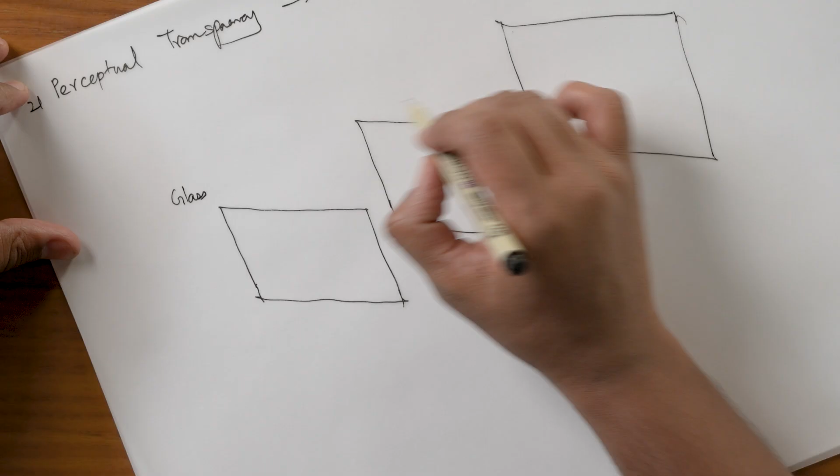We brought in the essence of slow living into this 21st century home. We try to achieve it by using the principle of spatial layering. Let's say this wall is glass, and then this is a kind of a porous jali, and let's say this

is another translucent partition. Let's assume that there is a kind of greenery between these two planes, and there is a kind of water body between these two planes. Imagine when a person perceives this particular series of planes with different kinds of materials

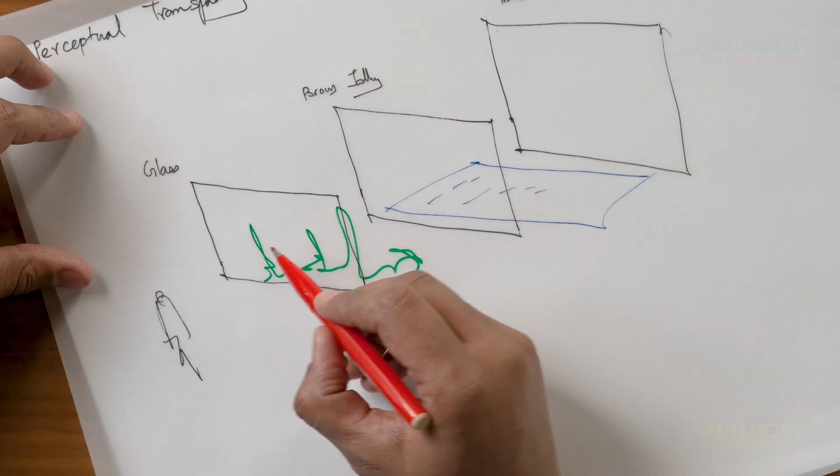and with different kinds of mediums between it, it will create different kinds of experiences. It will emote different kinds of experiences. So everything, if you change the order, it might emote a different kind of feeling.

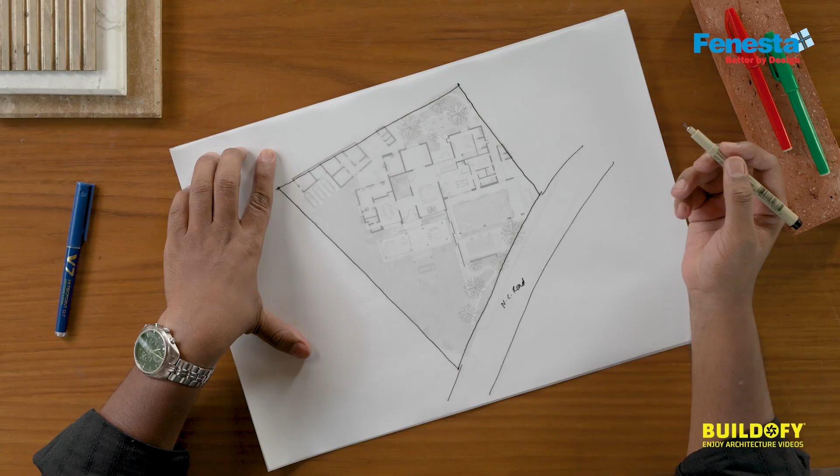So the site is almost spanning around 23,500 square feet, which equals around 10 grounds of property. It is abutting a sub-road which is called the North Crescent Road. If you look at the orientation of the site, this is basically the north point of the site.

So basically the site is a north-facing property. When we first visited the site, there was already an existing building structure. We were looking at repurposing the building, and we had to retain the RCC framework, which is the roofs, columns and beams, and brought down all the wall structures so that we can try to zone different spaces based on the client's requirement.

This is the entrance gate for the property, located in the northeast quadrant of the building, which is one of the very preferred locations as per Vastu. The car comes over here. You can see the movement of the car will be something like this.

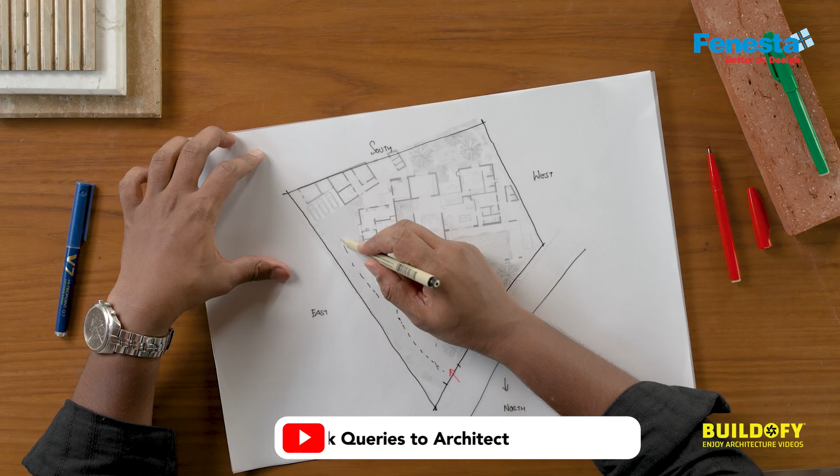It comes here and then drops people here. Then it turns back and can park here or go out. This was the circulation pattern, or it can go towards this direction, and there were 3 car parks in the rear part of the building.

So there is an entrance portico where there is a furniture arrangement in the formation of an L, so that people can just wait for the clients, or if any guests come, they can come for a coffee here. They can enjoy the early morning coffees or read newspapers, and they're surrounded by nature on all sides.

And the home office is situated right outside. So this is where we wanted to bring the aspect of work away from outside the main living habitable spaces. This is the entrance foyer.

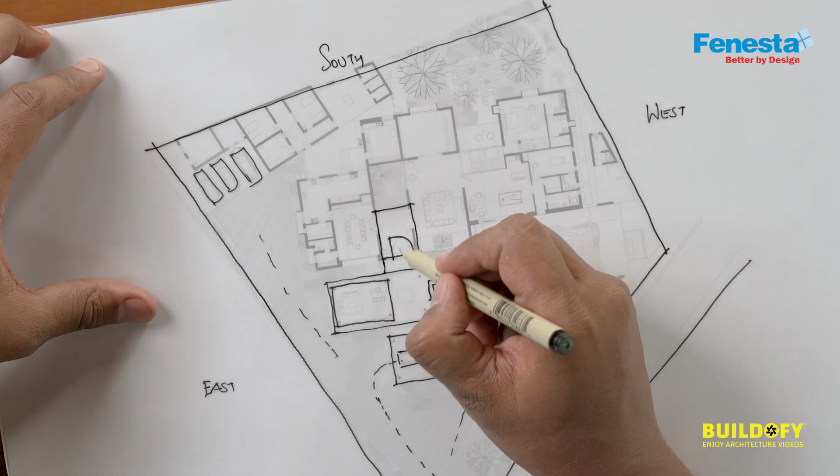This is almost a kind of transitional space, with a nice 8 feet door which opens out into a Zen court. The Zen court is a kind of welcoming court for a person, so it puts them in a sense of calmness the moment they enter.

And from there, if you take a left, the dining is secluded very strongly towards the east side of the property, where the dining is situated here, a 10-seater dining.

You can see that this is the shape of this complete living area, which is quite grander with a nice double height. And this overlooks into a green pocket over here. So basically this living will get a very nice early morning north light, and a nice very diffused lighting throughout the day.

The recreation lounge is a kind of place where the clients can just sit back, relax, or do a book reading there. And this particular space opens out into a very nice pool over here, which is surrounded with very lush landscapes.

About the idea of perceptual layering, where we try to layer this particular recreation lounge as an indoor space, sandwiched with the green space on this side, and also a green space on the rear side, so when you sit in that room, you will be seeing greeneries on both sides.

This particular zone has got a very nicely lit path where the swimming pool area's flooring is covered with wooden decking material, and the main pool's flooring is with broken kadappa. We try to camouflage the natural material so that it creates a very good essence in the space.

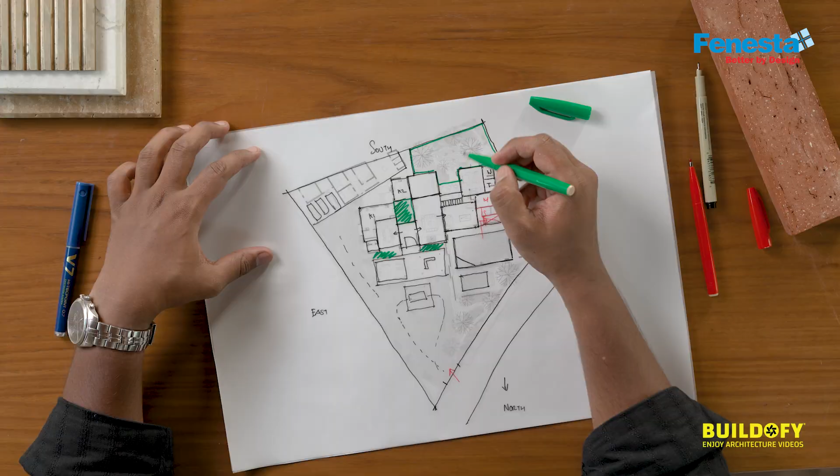This tropical garden forms a kind of a mini micro forest, I would say, so it really helps in changing the climate of the place. This is completely dense with landscape, and we believe this space will be used as a space where one opens out themselves, it's self-reflective, and they connect with nature. This garden can also be viewed from different levels—the master bedroom's balcony overlooks this garden, so it forms a kind of back-end retreat for them.

The laterite is one of the very key elements. This is a finish we used to create a jali wall using laterite blocks. This strong red terracotta forms the central language of the house, a kind of pivotal plane in this entire project.

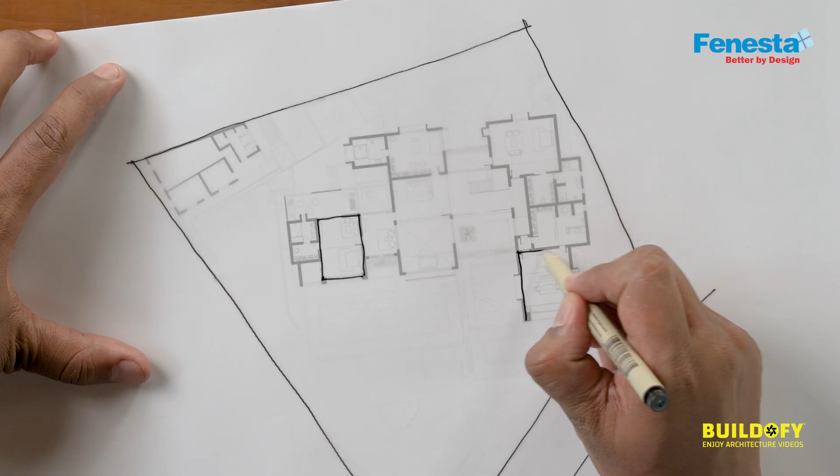This is the floor plate of the first floor. On the west side we have two bigger bedrooms, one of which is the master, and we have got the third bedroom over here, and the fourth bedroom with its walk-in and toilets over here. So the organization of the bedrooms is such that the east side has two bedrooms and the west side has two bedrooms.

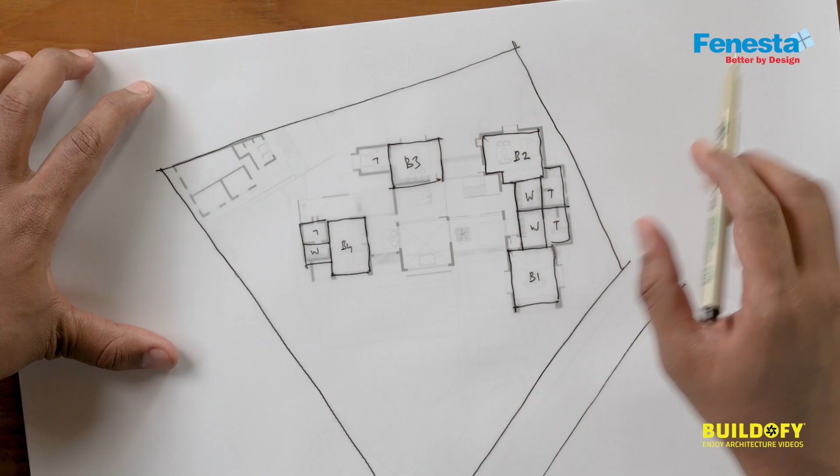The moment you come from the ground floor to the first floor, this is the central core, which has got a dog-leg staircase. So the moment we come here, we are landing into a very nice transitional space. This transitional space connects two bedrooms, and also from the transitional space you can get into a court with a smaller gazebo at the top of this, and from this court you can overlook the pool.

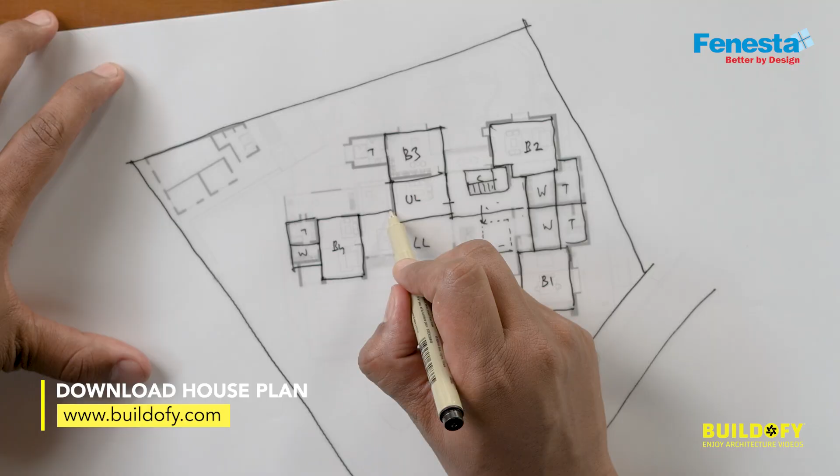So this is a moment where you will have a very good visual connection with the ground floor. The upper living overlooks into the lower living, which is a double height space, and from this upper living it again connects to a kind of ante space, which connects to the other bedroom.

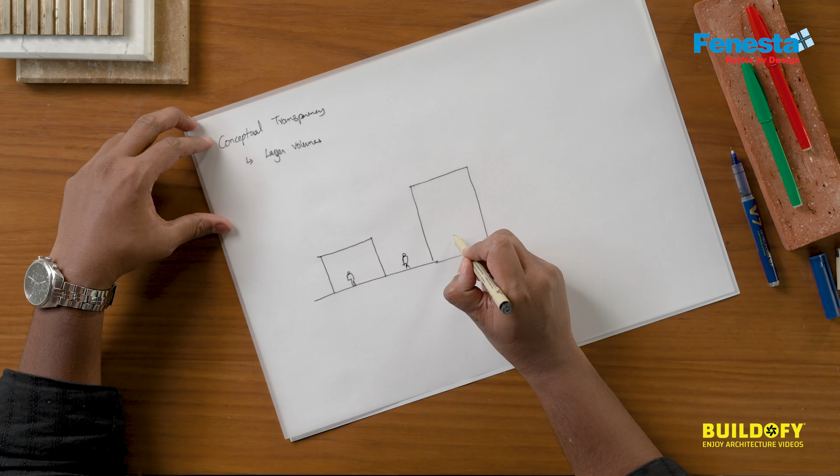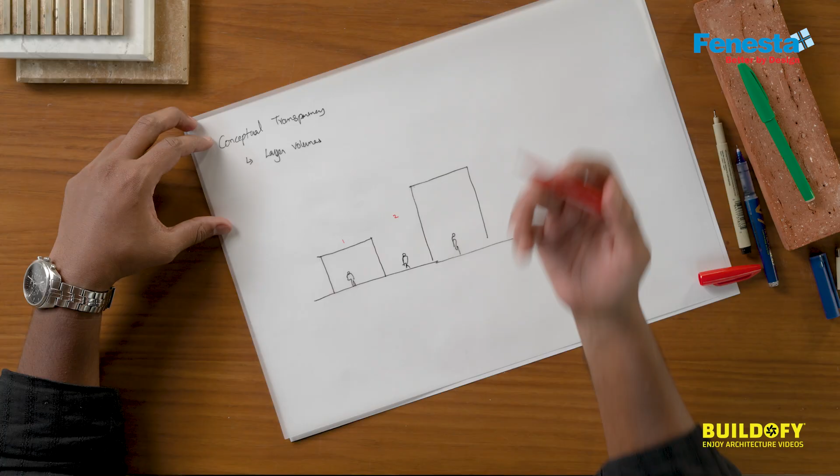Let's say a human is experiencing the built structure in an open space, and let's say a human is experiencing a built structure in this one. If you look at this complete thing, they will get different kinds of emotions—a sense of compactness in the first one, a sense of refreshingness in the second one, or a sense of grandeur in the third. So we try to explore and bring in a kind of harmony by organizing these kinds of levels.

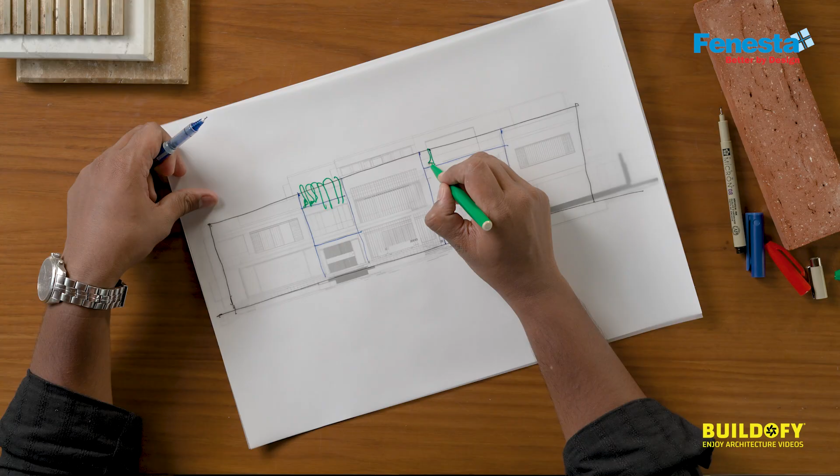So these parts, how we try to break it and then cascade these areas, and we introduce a kind of green which is flowing on from the top. The green is coming from the top and then flowing on over here, and again the green is cascading from this level, and then cascading at this level over here. In a way we try to give a pause so that it became three individual white blocks, like how you see here. This is a kind of layering we did with the greens, with the landscapes over here, going in behind these blocks.

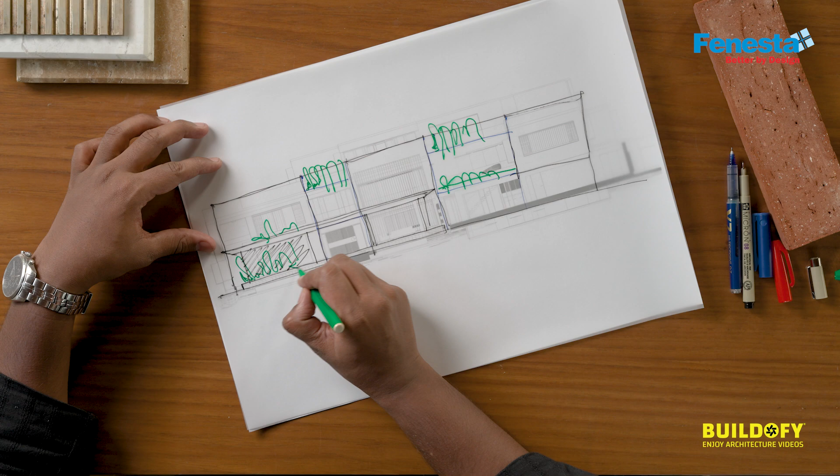In a way it completely mellowed down the entire volume and gave a kind of very simple, I would say a very soundless intervention.

The indoor and the outdoors are blurred, you don't see a strong distinction. The thresholds are completely blurred. You start feeling that you start to live along with the greens, and you surround yourself with the greenscapes over here.